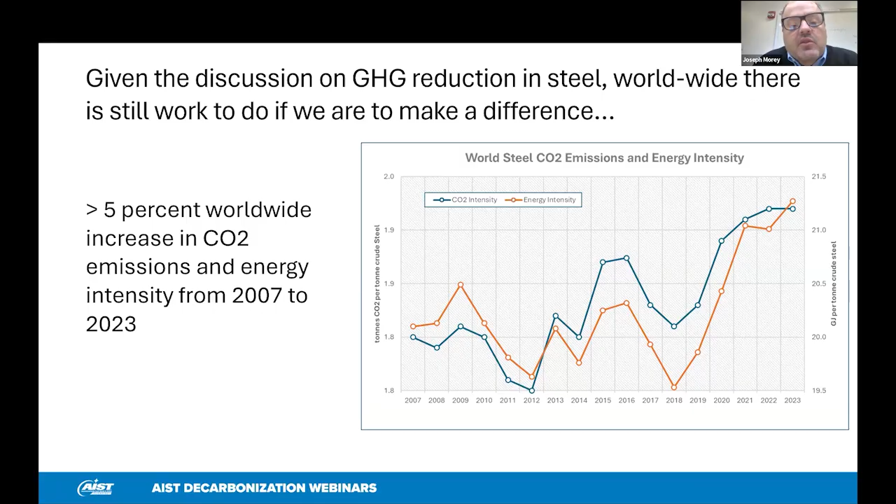The Paris Climate Accord came to pass, and there's a lot of signatories on this accord, and we all promised that we're going to reduce our carbon footprint as a whole world, and steelmaking is no small part of that. As you can see here, since the signing of the Paris Climate Accord, we've actually increased our carbon footprint as far as steel goes by 5%, from 2007 to 2023, and there's no sign that it's slowing down either.

So it seems that there's a strong iron, a blast furnace footprint for iron making. Over 70% of the world's steel comes from traditional blast furnace routes and blast furnace capacities that continue to come online.

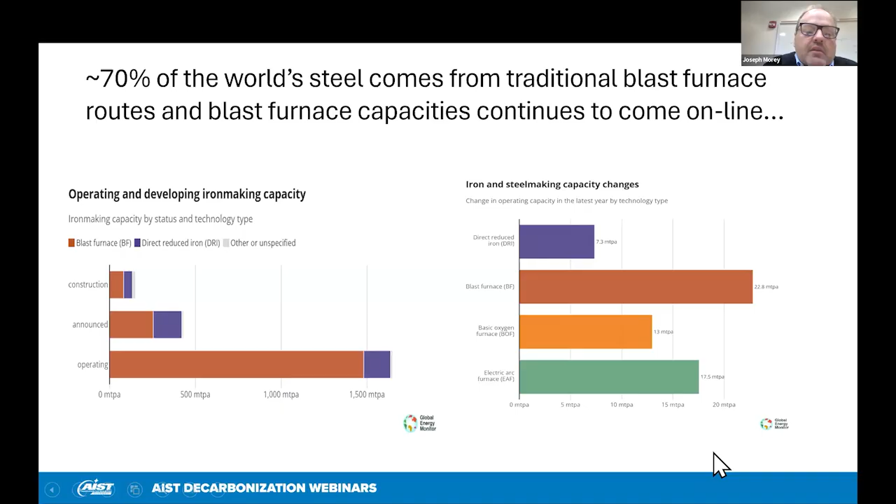Can you go to the next slide, please? As you can see here, in North America and Europe, there's blast furnaces that are shutting down, and in parts of Asia, blast furnaces continue to come online, and it just continues to balance out at around 70%. That figure has been stable for the past 10 to 15 years.

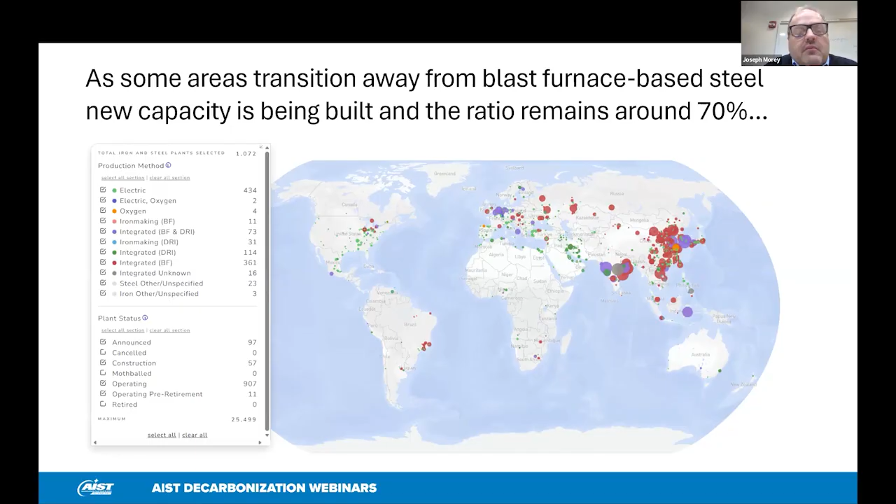Go to our next slide. So today, we're going to talk about the second part of our series where we talked about this pathway before. Now we're going to be focused on the boiler house, blast furnace, and steel making area on what exactly we can do to reduce our carbon footprint, which is the biggest lion's share of the carbon emissions.

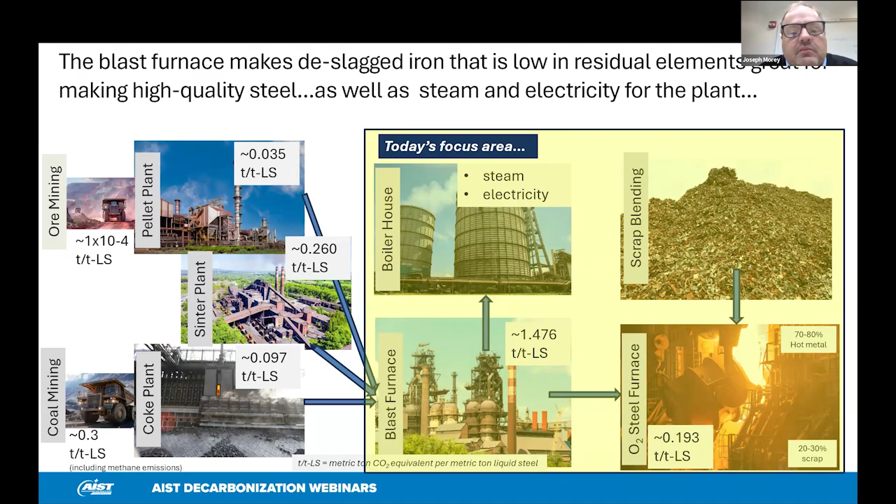Thank you, Joe. You summarized very succinctly the current dilemma that although we are looking at new processes that are going to be zero net carbon, the blast furnace process continues to predominate, and we need to do something about it right now rather than waiting for another 20, 30 years.

So the goal of our webinar today is to learn about what are the currently available practical and pragmatic technologies that can achieve significant reductions in carbon emissions right now from existing blast furnaces and existing BOF facilities, well before the cutting edge technologies that are on the drawing board can be commercialized.

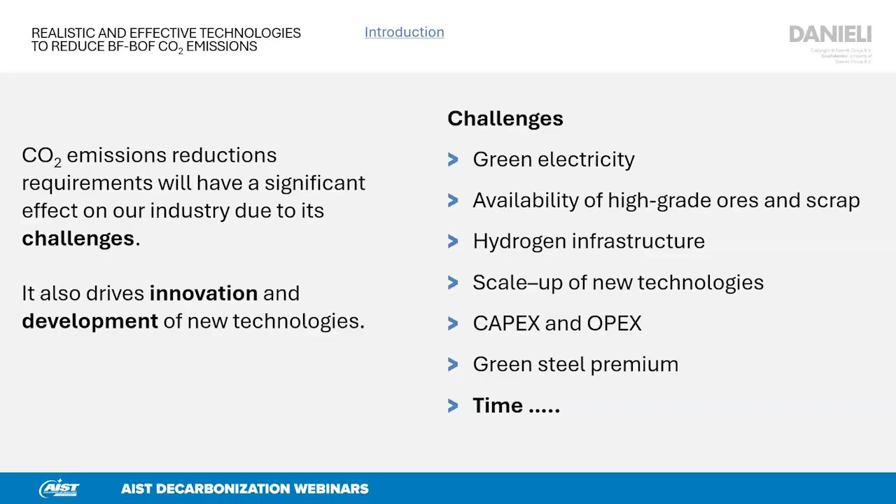We can wait for new emerging net zero technologies, but realistically, this will take another few years. Within our organization, we are convinced that a significant part of steel making for the coming decades will comprise basic oxygen furnaces and also blast furnaces, which is why we are determined to assist the industry in decarbonization of blast furnace and basic oxygen furnace.

For this reason, we started an internal assessment a little while ago to assess the impact and effect of different technologies that could be used for decarbonization of blast furnace ironmaking and basic oxygen furnace steelmaking. For this purpose, we set up a rather comprehensive spreadsheet model, which includes all of the main facilities of a typical integrated iron and steel making plant, such as sinter making, pellet making, coke making.

Also iron making, either by blast furnace, but also potential new direct reduction plants on site or remote. Steel making by means of basic oxygen furnaces, casting. And the spreadsheet model also includes oxygen and steam, and last but not least, electricity and hydrogen.

Any usage of hydrogen does matter because we have been assuming that any hydrogen would realistically be made by contemporary electrolyzers which are connected to the grid. The electricity grid carbon intensity these days is generally anywhere from 300, 400, 500, 600 grams of CO2 to produce 1 kilowatt hour. So we cannot ignore those emissions, as there's simply not enough green electricity as we speak to service the steelmaking industry. Maybe on the longer run using nuclear energy or other sustainable energies.

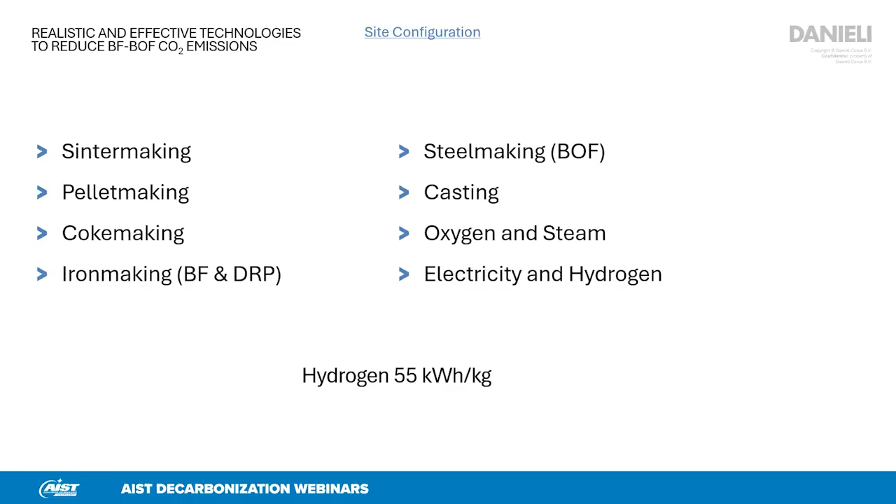And we have actually been looking into a typical large blast furnace with a coke rate of 340 - a little conservative number - and a coal injection rate of 180.

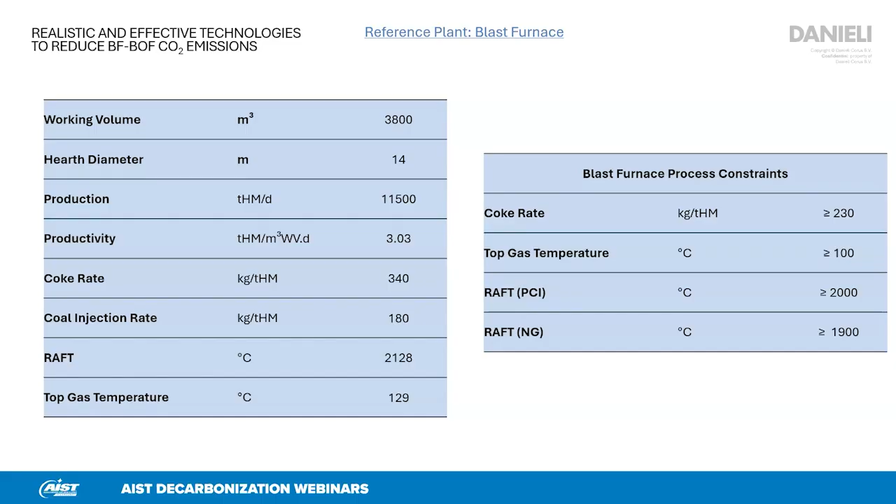The other key KPIs are reasonable. Within the spreadsheet model, we've been using detailed results of our thermodynamic blast furnace steady state heat and mass balance model, while assuming realistic constraints commonly accepted in our industry on minimum coke rate, minimum top gas temperature, and RAFT for using PCI or natural gas. Adding up all emissions of sinter making, pellet making, coke making, etc., the total emissions of this reference plant add up to around 2067 kilos of CO2.

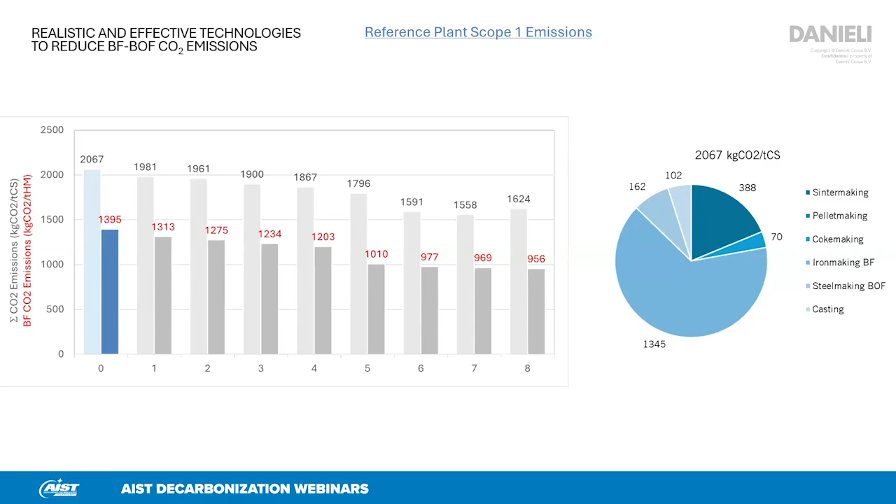We need to bring this number down. Within the remainder of the presentation, we will take you along on our journey, analyzing 3 different technologies to reduce crude steelmaking emissions to less than 1,600. By the end, I will also share a forecast, because that number could be even more reduced in another few years.

How could the number of 2,067 kilos of CO2 be reduced right away? There are 2 methods. The first is to implement best available technologies. Three such examples are summarized on this slide: a modern charging unit to reduce the coke rate through more optimum burden distribution and maximized gas utilization.

Second is to adopt modern hot blast stoves with a hot blast temperature of 1200 degrees centigrade instead of the more conservative 1100 degrees centigrade. Last but not least, implementing modern state-of-the-art automation level 2 systems, including, as an example, heat flux monitoring to reduce heat losses by gas flow along the reactor.

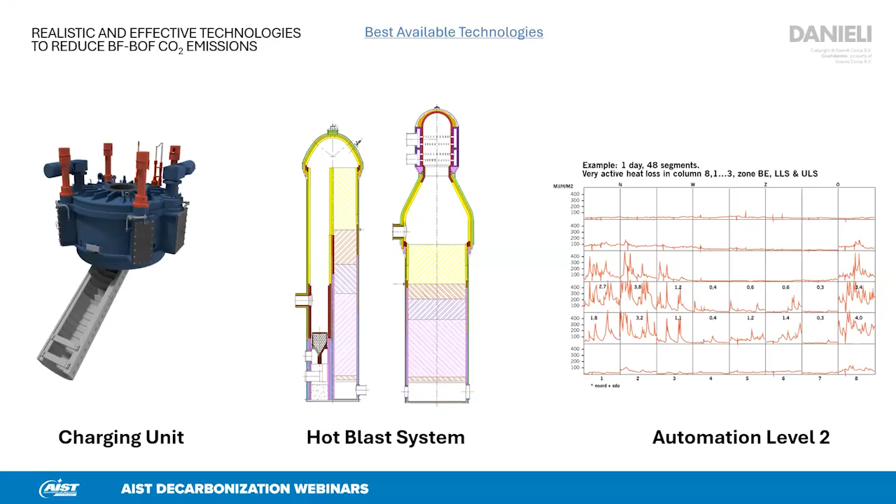Second, right away, the industry can further optimize efficiency and yield of blast furnace iron making and basic oxygen furnace steelmaking. Five examples we came across at some steelmaking companies are summarized on this slide: minimizing burden moisture and raw fluxes, maximizing yield and recycling of fines and reverts, and maximizing hot blast temperature, also by using energy-saving tuyere stocks and tuyeres.

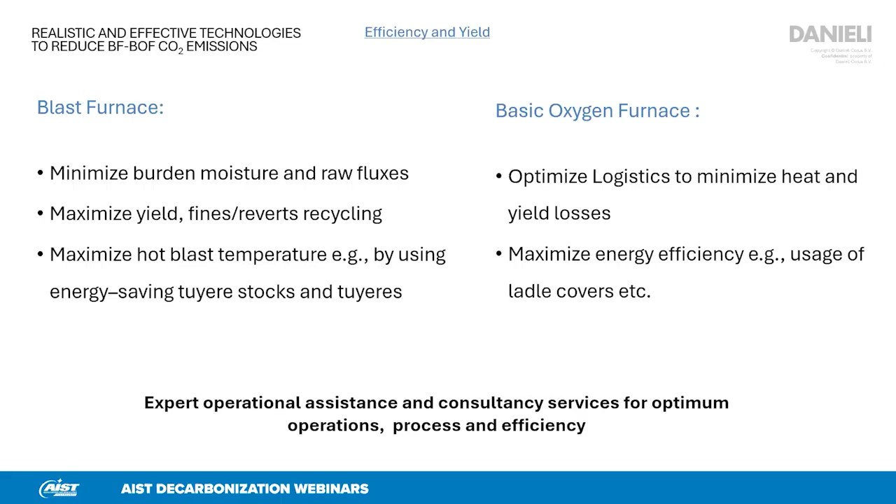When we look into basic oxygen furnace, we've come to realize many steelmaking companies could optimize their logistics to minimize heat and yield losses, and also maximize energy efficiency, for example, by usage of ladle covers.

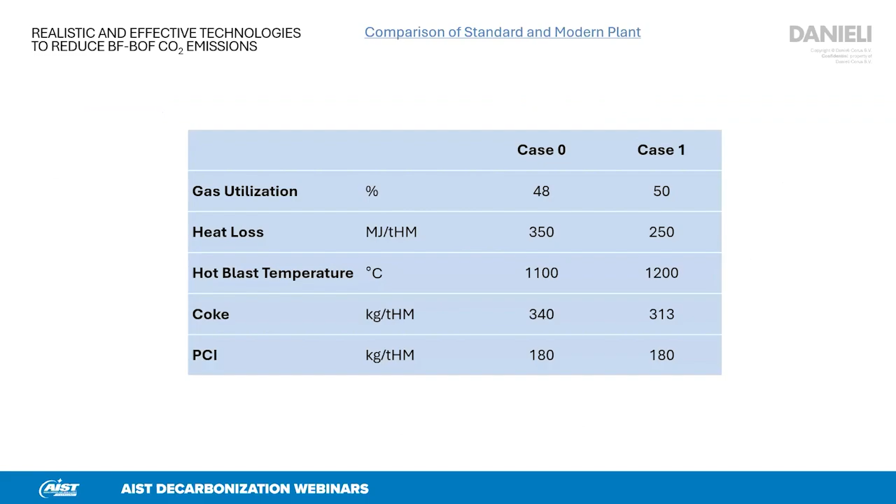If the best available technologies and some efficiency and yield improvements are factored in, emissions will already be reduced by some 5%, as a result of improving gas utilization, reducing heat loss in the blast furnace, and increasing the hot blast temperature. This will reduce the coke rate whilst retaining the PCI rate, and by reducing the coke rate, overall carbon emissions will be reduced to approximately 1,981 kilos of CO2 for 1 ton of crude steel.

This modern reference steelmaking plant is actually a net exporter of electricity, around 134 kilowatt hours for each ton of crude steel, by nature of combustion of any excess blast furnace gas and coke oven gas, using that heat to generate export electricity.

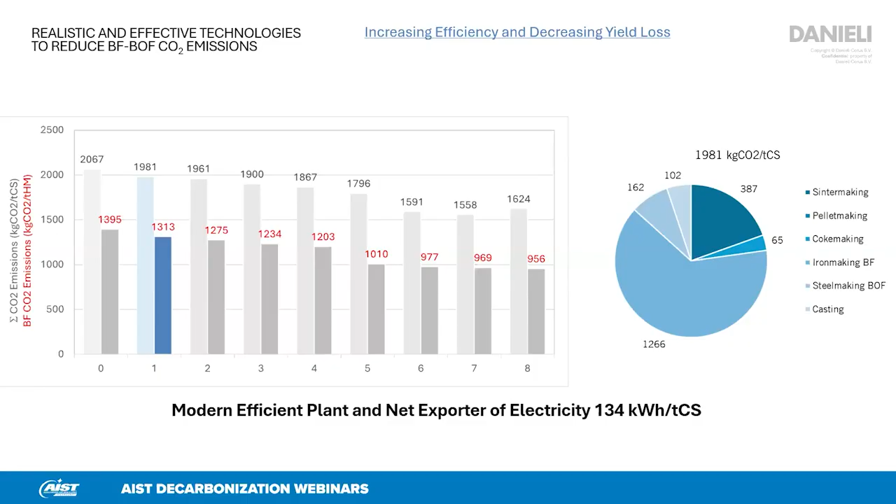Now let us look into one potential technology to reduce CO2 emissions, which is usage of gas injection. We've been analyzing 3 different types of gas injection. The first, already practiced in the United States and also in Russia and 1 or 2 other countries, is usage of natural gas. We've assumed this is constrained by a maximum amount of approximately 100 kilos per ton of hot metal, and it would rule out usage of PCI.

Second, we've been assessing the impact of using coke oven gas instead, at a moderate rate of 40 kilos for 1 ton of hot metal, plus another 180 kilos of PCI. You may wonder why 40 — we've realized the availability of coke oven gas on its own is limited by the coke making plant. Some coke making plants may produce more coke oven gas, others less, but we believe a moderate average number for our industry would allow usage of approximately 40 kilos of coke oven gas for each ton of hot metal, as we also need minor amounts of coke oven gas for enrichment in hot blast stoves, but also for heating in the reheat furnaces.

Third, we've been looking into usage of hydrogen, and we've assumed a moderate, reasonable rate of some 20 kilos of hydrogen for 1 ton of hot metal. Two industrial plants in our industry have already demonstrated usage of hydrogen in excess of 10 kilos on industrial facilities.

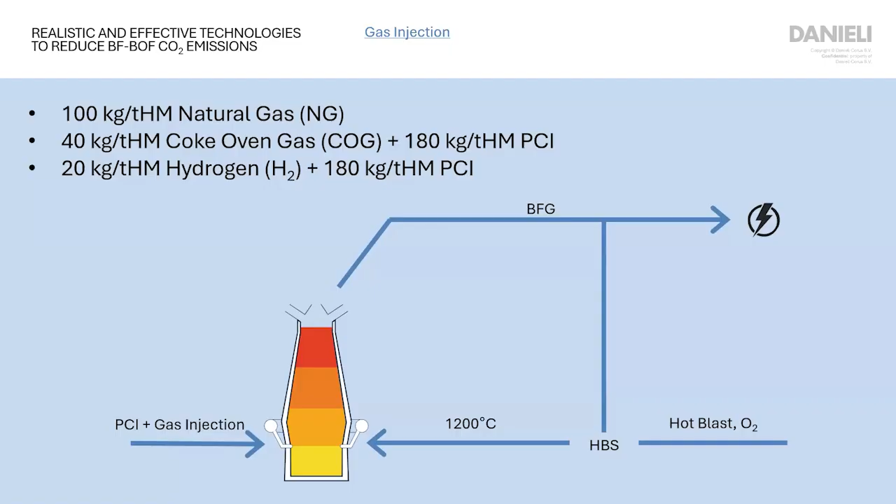Experimental blast furnaces have already demonstrated capability to inject much higher levels, even beyond 40 kilos. But there are some setbacks to doing this on the heat balance. So we've been assuming a moderate amount of 20 kilos.

Let us first look into the KPIs of the blast furnace when comparing natural gas, coke oven gas, and hydrogen. The coke rate for injection of natural gas is relatively high because we have nullified coal injection rate in order to allow maximum usage of gas. The coke oven gas coke rate and hydrogen coke rate are less than our reference blast furnace, which means CO2 emission reductions will be accomplished. For your information, the reference blast furnace plant had a coke rate of 313 kilos.

More interestingly, let's look into the impact on the electricity balance. The potential export of electricity will double when injecting natural gas because more blast furnace gas at a higher calorific value will be produced. The export of electricity will be reduced to only 32 kilowatts when injecting coke oven gas, because there would be no more coke oven gas for combustion in the power plant to produce electricity.

And far worse is actually the electricity balance when injecting hydrogen. Then we would need to factor in the usage of more than 800 kilowatt hours to produce 1 ton of crude steel by means of injecting 20 kilos of hydrogen.

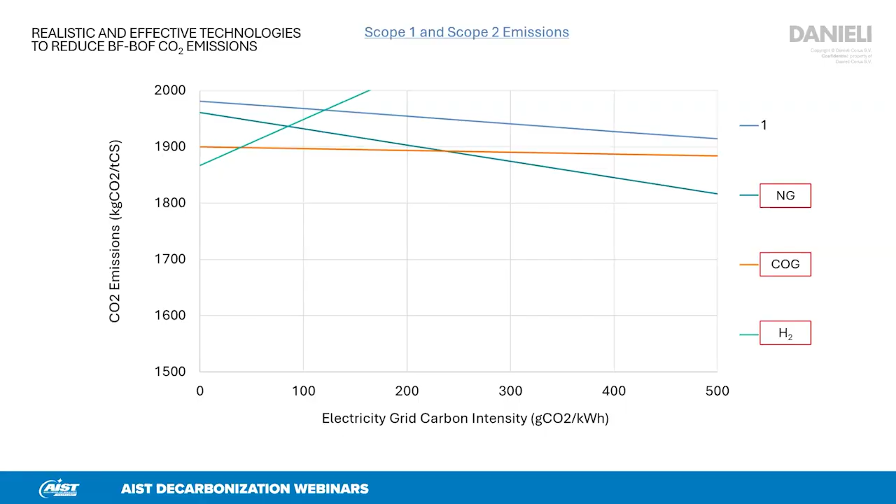Let's look into another group of technologies which includes charging of metallics in the blast furnace. And I deliberately refer to metallics. What are metallics? Metallics could be DRI, HBI, even scrap. Metallics could also include briquettes if they are mainly made up of iron reverts.

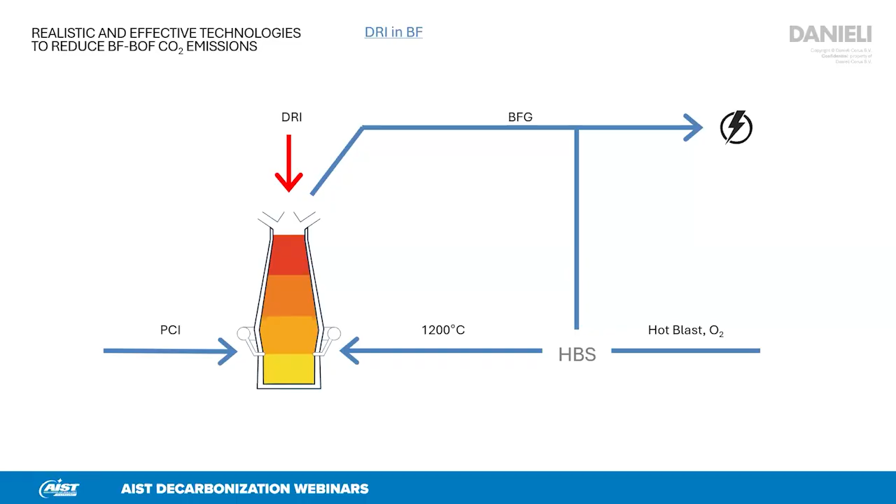We've been looking into different scenarios of charging metallics in the blast furnace, and within this presentation we will focus particularly on charging DRI. The examples I will share in the next few slides assume 30% of the burden comprises DRI. There's a good reason to limit this number to 30%. We've also made calculations for 40% and beyond, but I will explain later why we have looked into the 30% scenario, as we believe this is the most realistic these days.

DRI is made in a direct reduction plant, as we're all aware, and most DRI these days is actually made in shaft furnaces, which could include, for example, Midrex. This technology could use either natural gas, coke oven gas, hydrogen, even syngas, and I would say any blend of those gases. For simplicity, we are ignoring the usage of syngas, so within the next few slides we will only look into using either 100% natural gas, 100% coke oven gas, or 100% hydrogen for simplicity.

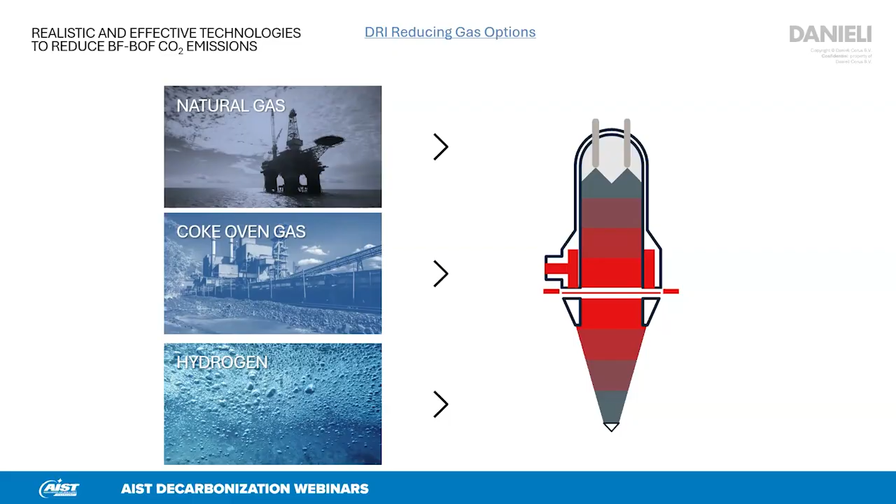Usage of coke oven gas for the production of DRI is actually not new, and I would like to put two examples to your attention. Those are two of the most recent industrial demonstration plants, which were commissioned and are currently operating in China, to produce 0.5 million tons of DRI per year and 1 million tons of DRI per year using coke oven gas. So the usage of coke oven gas to produce DRI on its own is not new, but the industrial scale is emerging fast in China as we speak.

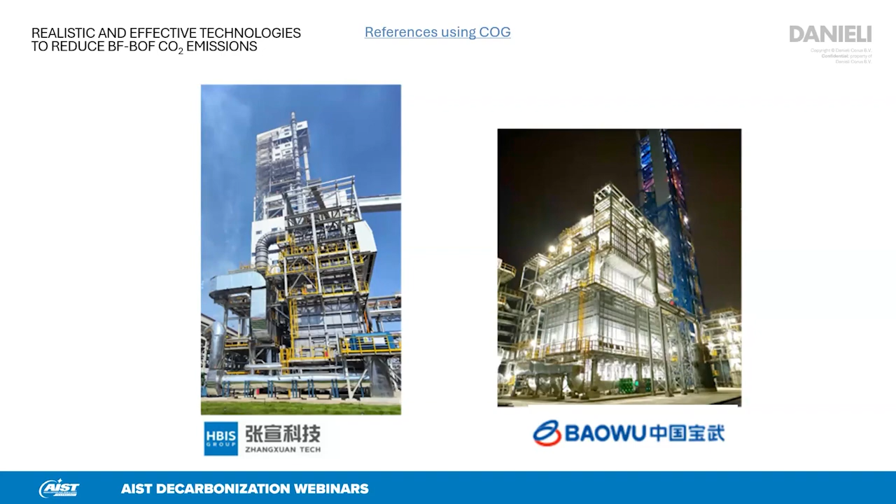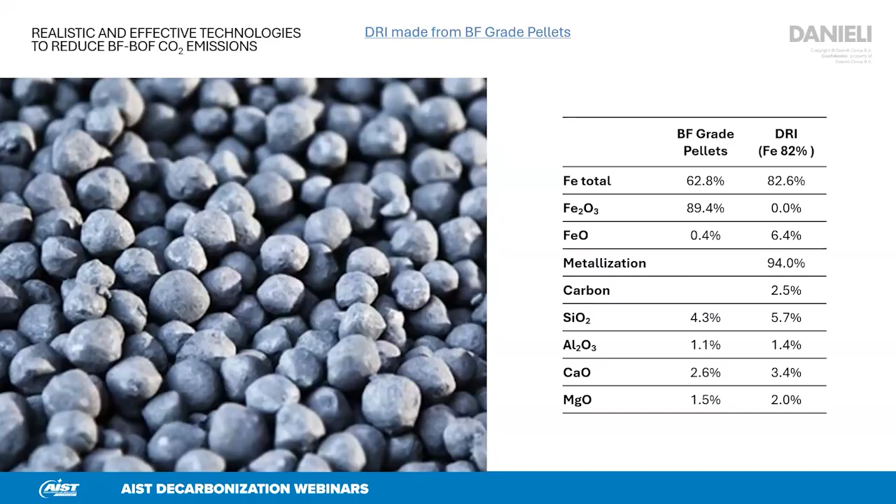Second to that, we know that high-grade ores are limited in availability, so ideally our industry would be using lower-grade ores. This is actually very attractive when charging this DRI in the blast furnace. We have been looking into the usage of BF-grade pellets to produce a DRI with a lower iron content, compared to an alternative scenario using DR-grade pellets, which would produce DRI with an iron content more than 90%. So this DRI is sort of low-grade DRI, it has a moderate metallization but a relatively high amount of gangue components. We can charge this in the blast furnace because the blast furnace is the ideal smelter.

Let us again look into the KPIs of the blast furnace when charging either DRI made by natural gas, DRI made by coke oven gas, or DRI made by hydrogen. You can see a coke rate reduction which is similar for all three scenarios. We have reduced the coal injection rate somewhat, mainly because we would then produce a little bit more coke. We also didn't want to violate the lower limit to the coke rate, which I already shared before. The more coke we would charge, the more coke oven gas we could produce, and this balances out to the 30% I've already mentioned. So if more coke oven gas would be available to the industry, then the 30% we have been assuming could be raised to 35, 40%, even beyond. But in reality, there are limits to the availability of coke oven gas.

Again, if we look into the electricity balance, it's still a minor export when DRI is being charged made by using natural gas. We need to import electricity when the DRI is made by coke oven gas, because all of the excess blast furnace gas would actually be used for the direct reduction plant process gas heater. But the amount of electricity that we would need when using hydrogen is really very, very significant.

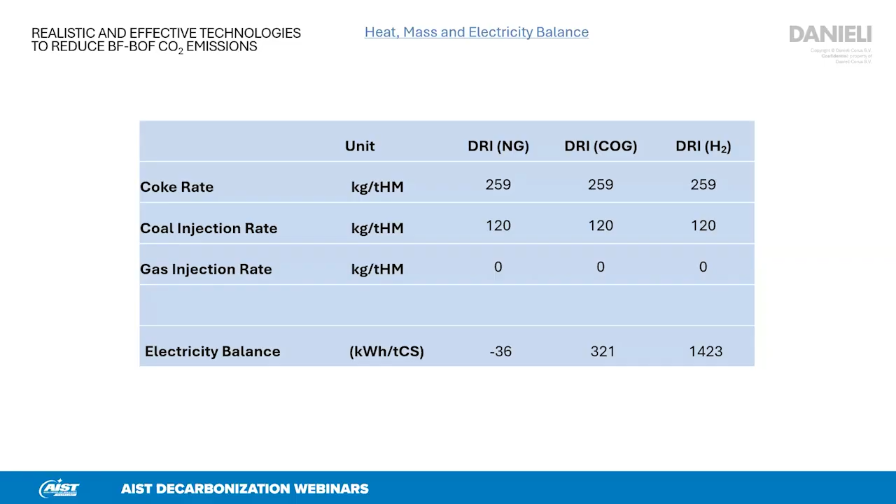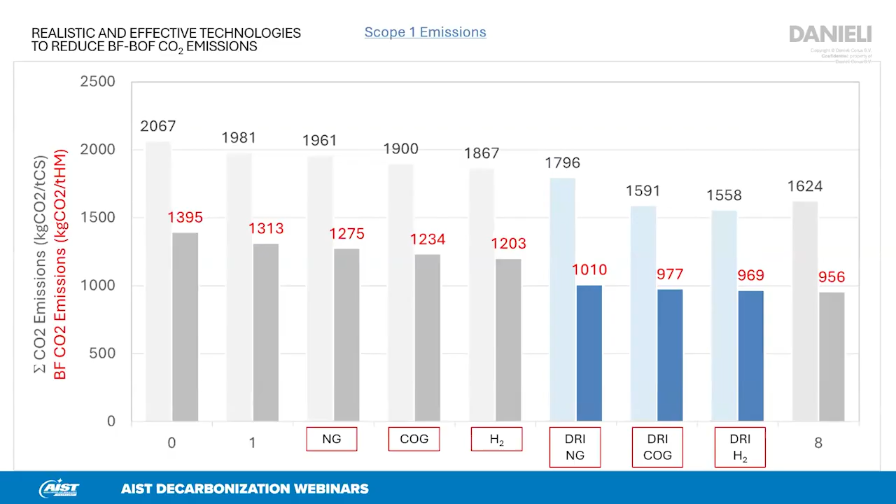If we look into the scope 1 emissions, using natural gas has a benefit, but it is limited because of the CO2 emissions generated in the direct reduction plant when using natural gas, also when using natural gas for the process gas heater. A rather significant reduction could be accomplished when the DRI is made by coke oven gas, and the same is true when DRI is made using hydrogen. But if we factor in the scope 2 emissions, then those would be quickly worse when DRI is made using hydrogen, and this DRI will then be charged into the blast furnace. So this graph suggests that the usage of DRI is beneficial, particularly when coke oven gas is being used to produce that DRI.

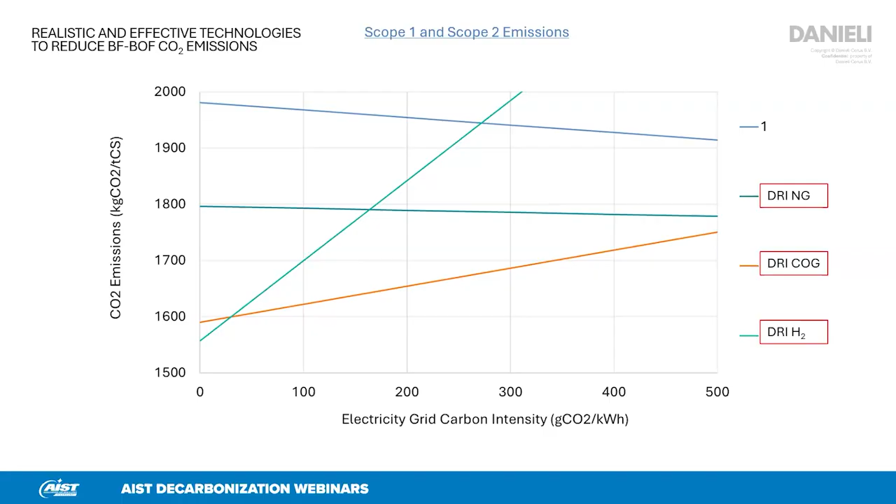Last but not least, we have a few minutes left. I would like to make a simple comparison to alternative top gas recycling technologies.

One of the main challenges in this industry is the scale up, because the scale up could have a dramatic impact on the efficiency of the top gas recycling scenarios. Until top gas recycling is demonstrated on an industrial scale, we simply cannot reliably predict the efficiency of this technology. So we've been assuming a moderate efficiency of top gas recycling, as reported in the industry.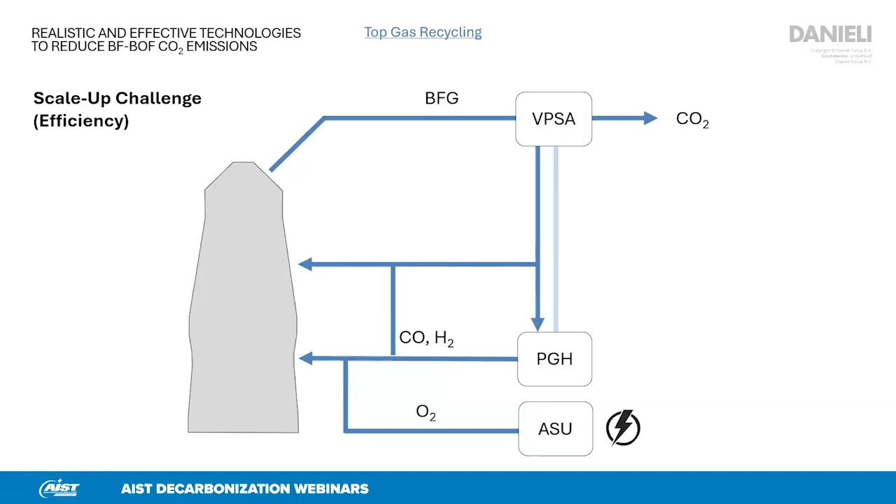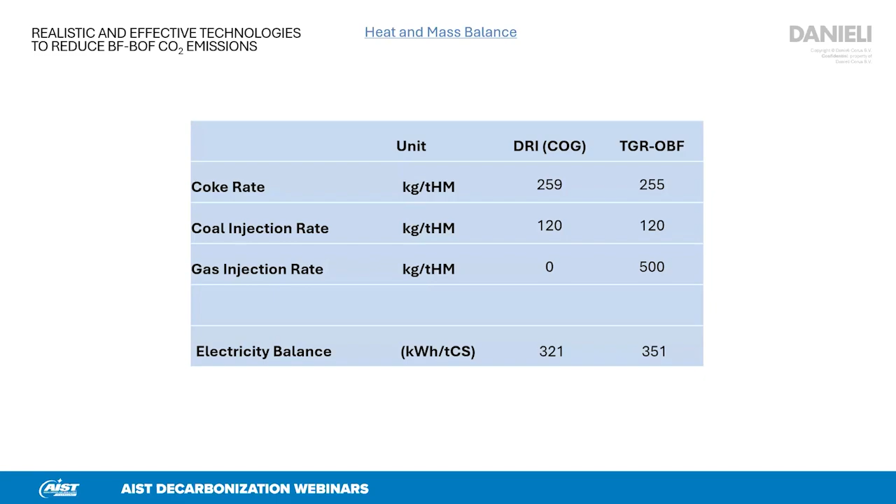Let's compare again the KPIs of the blast furnace and the electricity balance. What happens here is actually interesting: you can see right away that the coke rate of the option using 30% DRI made by coke oven gas and the coke rate of the top gas recycling option were comparable, I would say. In the electricity balance, it's also somewhat comparable. Let's make the chart.

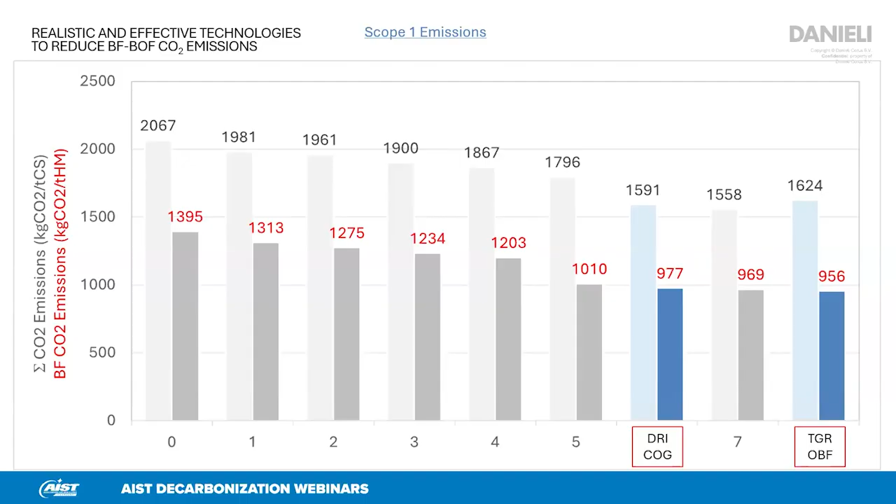As you can see, the CO2 emissions for scope 1 and scope 2 are also comparable. So we believe that charging the DRI using coke oven gas or top gas recycling oxygen blast furnace have similar impact on reducing CO2 emissions. But charging the DRI is already demonstrated on industrial scale. There's no new technologies, no scale-up risk, whilst those do exist for top gas recycling oxygen blast furnace. This is the main reason our current strategy focuses on charging the DRI, although we are not ignorant of the potential of top gas recycling oxygen blast furnace.

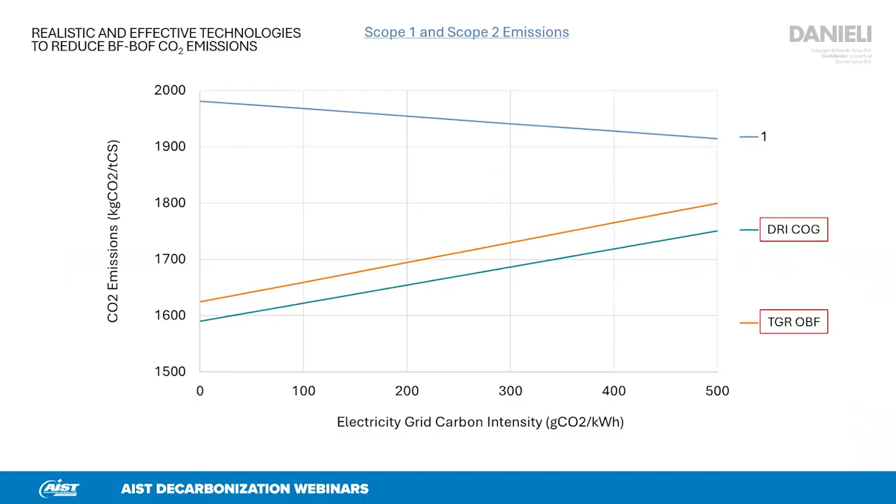Again, we can compare the scope 1 and scope 2 emissions, and I would say the two lines are somewhat comparable. I'd like to end this presentation with some conclusions.

We believe that realistic and effective technologies must be deployed right away, if not in the next 3, 4, 5 years. Those could and should include application of best available technologies, maximizing efficiency and maximizing yield.

Second, if gases would be injected into the blast furnace, ideally coke oven gas would be injected to reduce CO2 emissions. Third, more significant emission reductions could be achieved by charging DRI made using coke oven gas and also using low-grade iron ores.

This altogether would actually rule out the need for hydrogen. There's no risk in scale-up. We can use low-grade iron ores and continue to produce high-grade steel in the basic oxygen furnaces. This is why I believe these are realistic solutions to reduce emissions.

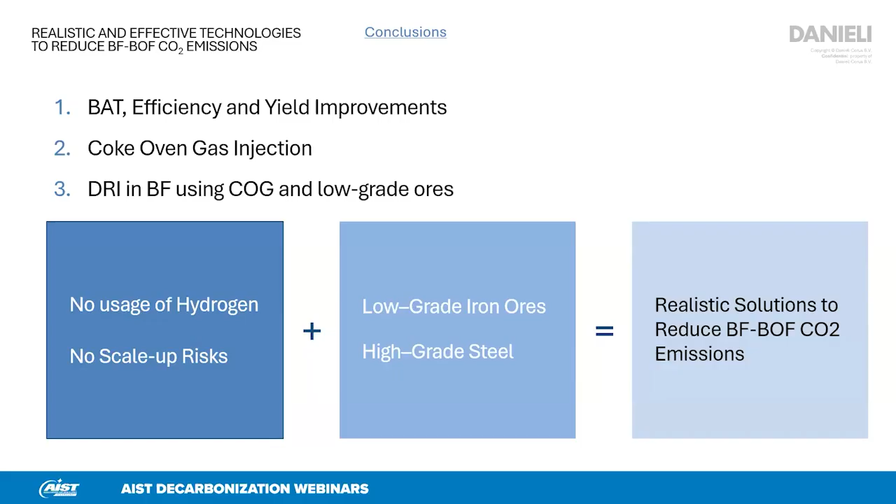Last but not least, I've just shared a few examples. In reality, we are already aware of the potential of raising metallics in the blast furnace to 40%, as demonstrated in Japan as we speak. We're also looking into maximizing metallics in converter steelmaking to 40%.

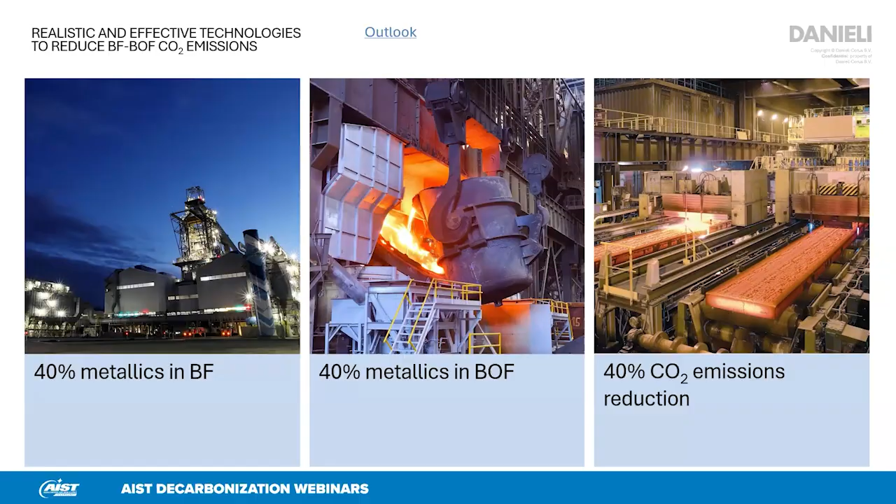If we add the one to the other, an overall CO2 emissions reduction of 40% could be accomplished. And there are some other trick cards we could add to actually reduce those emissions to less than 1,000. Thank you very much for your attention.

If there would be any questions, I'm happy to answer.

This is a very good question. I can only give a very generic response. Any technology we've come to realize will raise the cost of crude steel. That is only feasible if either CO2 emissions would be penalized, or if CO2 emissions reductions would be awarded by a green steel premium. It is not yet entirely clear to us which of those technologies would be most economic. For sure, the investment into top gas recycling oxygen blast furnace and all of the auxiliary plants is somewhat comparable to investment into a new direct reduction plant, which is a mega number. Capital investment into any gas injection technologies is, I would say, rather moderate. I hope that answers the question for the moment.

There's another question from Scott Norris: what is your opinion on the possibility of using biocarbon in the sintering and coke making steps to reduce the amount of coal utilized? These smaller quantity applications seem possible.

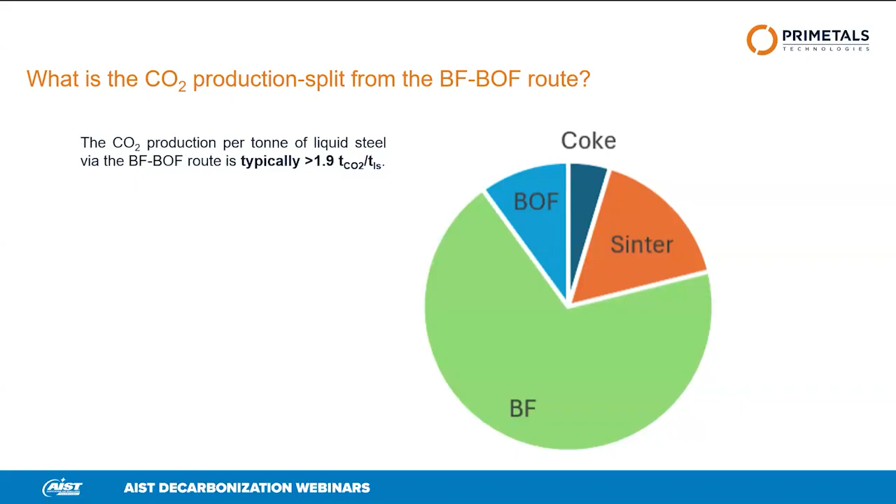But in preparing for this webinar, one of the questions Joe Morey asked us was, what is a good blast furnace? And I had to think about that question and how to answer it. Some operators listening will be lucky enough to have very modern furnaces with the latest facilities and benefits I'm going to talk about. But most people listening will probably have older existing assets and might be asking, what can I do? So what I want to do is talk not about the best technologically available blast furnace, but what helps with OPEX and what helps with CO2.

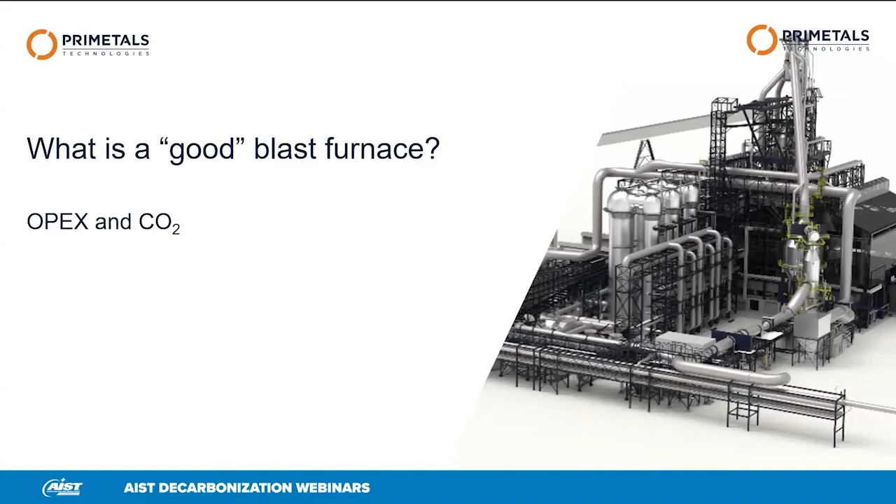So what is a good blast furnace? I just made a list of some of these items. But first, what does a blast furnace do?

We have to be honest, the value add in the blast furnace is nothing like the downstream technologies. So what we're normally trying to do is produce the lowest cost hot metal for use downstream. And what lowers hot metal cost? Well, best raw materials, clearly.

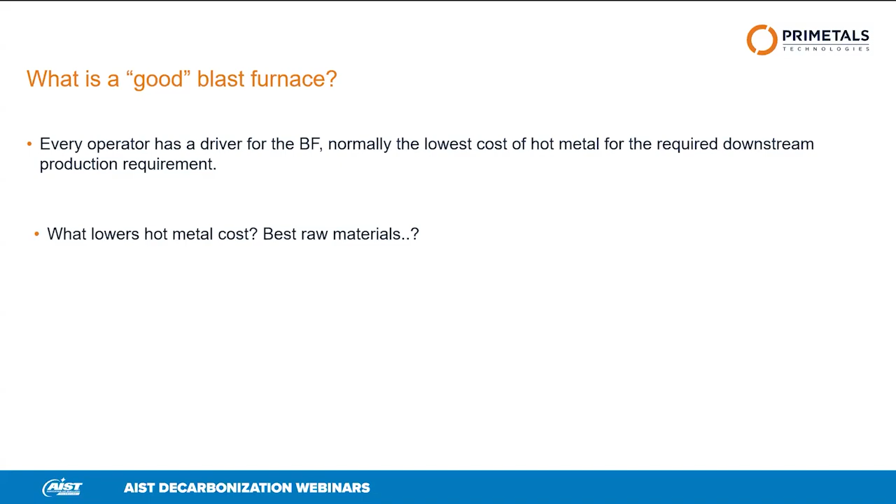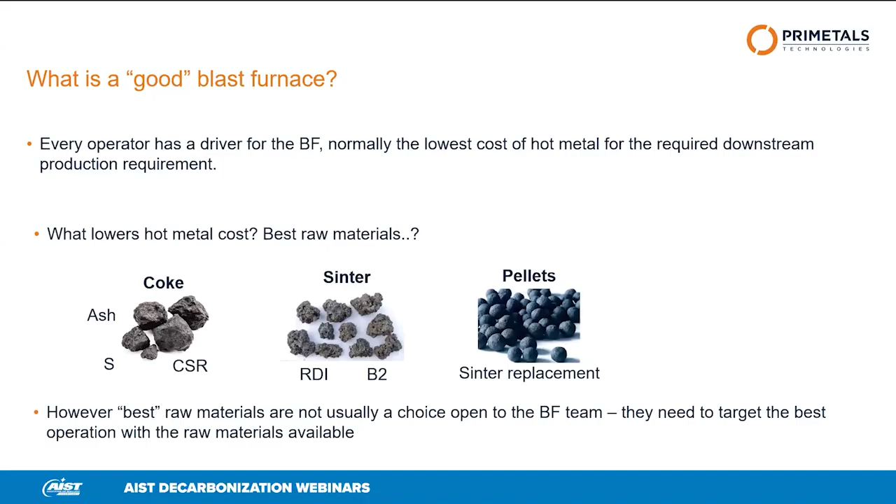Can I have the finest coke? Can I have the world's best sinter? Can I have the best pellets, etc.? But frequently, the best raw materials are either not a choice open to the blast furnace team, you're at the vagaries of the procurement team, or as we know, available quantities are coming down. So what we need to do is target the best operation with the raw materials available.

So the next slide just talks about some of the technological activities which can be used to both reduce hot metal cost and CO2. I won't go deeply on this slide. I've got another slide where I'll talk them through a little bit more, but it's not an exhaustive list, I'm absolutely sure.

But these items, if utilized correctly, are all going to help reduce your OPEX. And I guess because such a large percentage of the cost of running a blast furnace is the fuel and the carbonaceous fuel, most of these activities, in fact all of these activities, are going to bring the CO2 level down as well.

So maintenance to maximize your availability and to minimize the time when the furnace isn't running efficiently. Bell-less top for burden distribution. Level 2 optimization system, blast temperature, maximizing your blast pressure, or should I say your top pressure, within your available constraints. Top gas energy recovery turbine, the TRT, if you've got enough pressure. Avoiding gas flaring, and the SIP oxygen pulsing, which I will explain briefly later on, which is a relatively new technology.

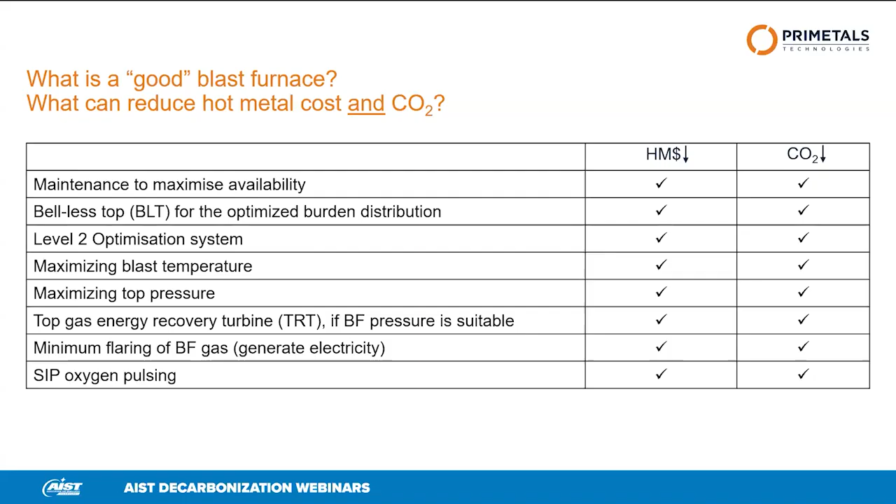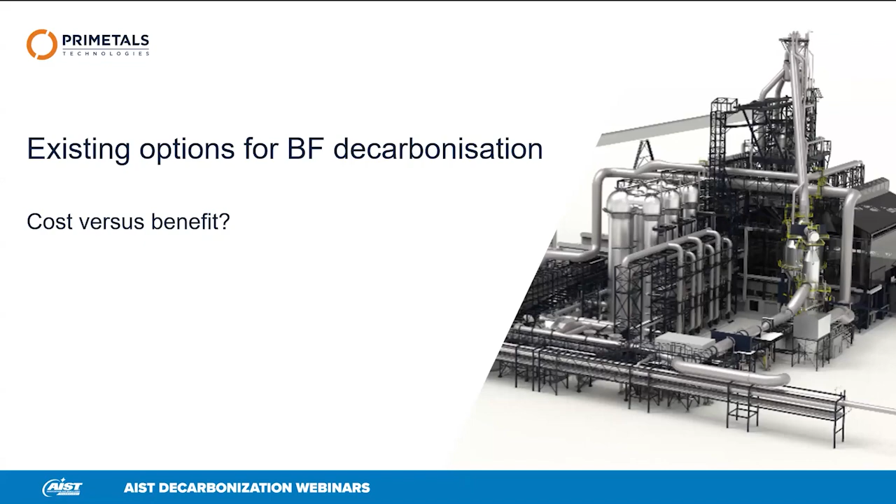There are a lot of other options out there for reducing CO2, but I wanted to try and discuss at a very high level, cost and benefit, because there are many options, more than I could fit onto one slide with photographs that you'd be able to read. So I've put a few just onto this slide.

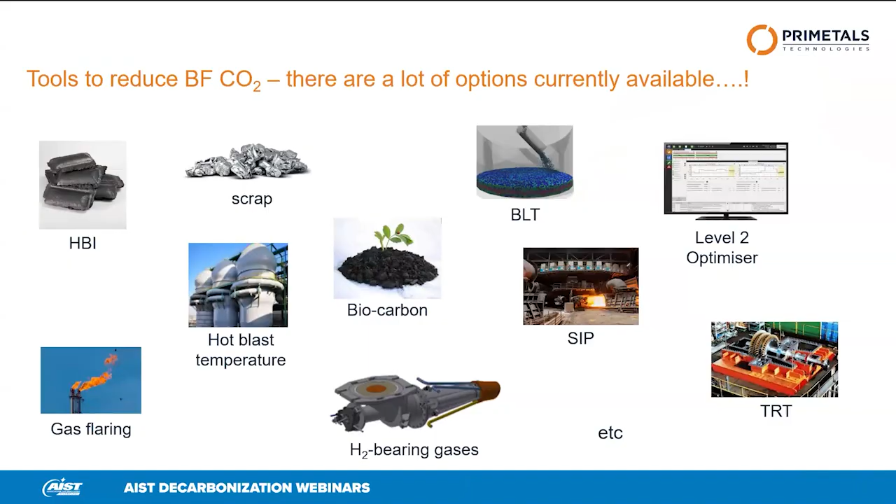But what's important, I think, is then to talk about them individually and maybe try and rank them. And in trying to rank them, how do you do that? So I've put a series of technologies on the left-hand side here, and I'm going to, again, at a high level, try and rank them on OPEX, operational cost, CAPEX, that's the capital expenditure, CO2 benefit, and then some comments on the side.

The one that seems to be most obvious from a cost benefit solution is the level 2 system, an optimizer for BF operations. OPEX, will it decrease OPEX? Of course it will, yes. What is the CAPEX for it? And you can see I've been very careful with how I've described CAPEX. I've called it very low. Everything else in my list is going to be either low or medium.

I guess when you are looking at a particular plant and the cost of the modification, and I'm thinking not the cost that the OEM is going to sell you a technology, it's the project cost for implementing the technology, so what the steelmaker pays. In my mind, low is in the region $1 to $10 million, and maybe medium is in the region $10 to $20 million. These are indicative. And level 2 is at the bottom end of low, so I'm going to call it very low. And depending on your starting point, of course, we see a CO2 benefit of something like 2.5%. So that seems to me absolutely the no-brainer.

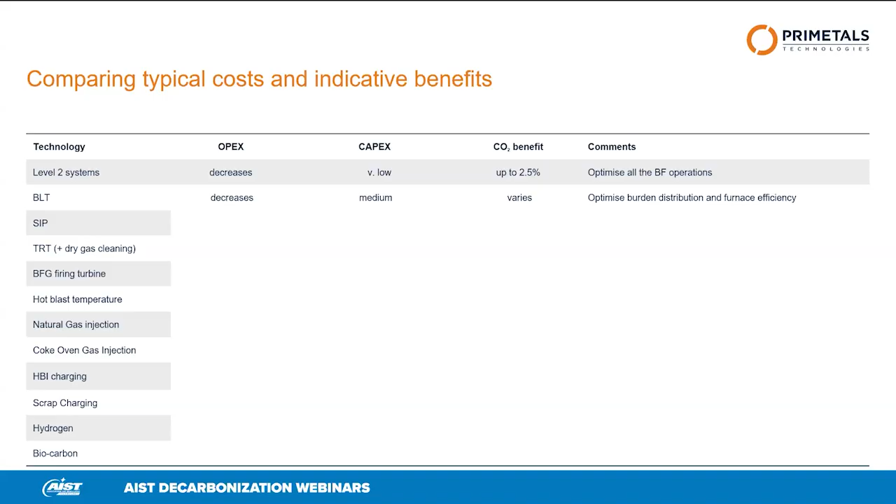So I have OPEX decreasing, CAPEX, as I say, to actually implement the BLT is probably low end of medium. And the CO2 benefit will be there. I would expect it to be there, but again, it will depend on the starting point, how good your operation is already.

I'm continuing in the way I'm ordering these, starting with the OPEX, in order to reduce hot metal cost. So I've put SIP next.

This is the sequence impulse process, oxygen pulsing. It's a relatively new technology. I've got a couple of slides on that. I didn't want to make this much of a promotional presentation, but I'll explain it in case there are people out there who aren't aware of it. This has been proven to decrease OPEX.

The CAPEX sits again probably in the lower end of medium. The CO2 benefit is, all of these are incremental CO2 benefits, and some of them can be added together. But for this one, the payback can be very large, very fast on larger furnaces. So I'll talk about that later.

Top gas recovery turbine and maybe dry gas cleaning. A TRT if you haven't got one, and if you have the top pressure to make it economic to drive one, which are both the proper questions to ask. If a TRT can reduce the OPEX, it's probably going to be in the medium range of CAPEX, and again an incremental CO2 benefit.

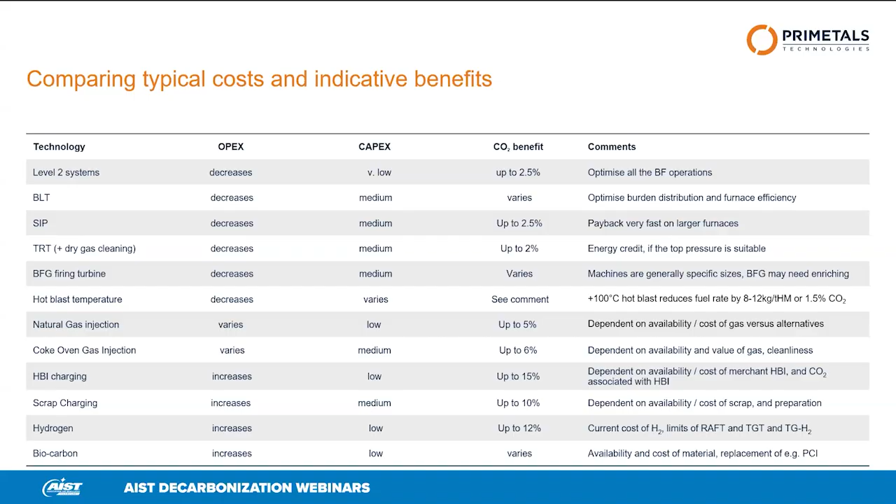A very quick introduction to SIP technology. This isn't meant to be a promotion, but just in case you weren't aware of it, it's on my list of opportunities. Sequence impulse technology is an oxygen pulsing technology developed by ThyssenKrupp in Germany on their blast furnace number 1 at Schwelgern, Duisburg. And the oxygen pulse is used to clean out the back of the raceway, the bird's nest.

Particularly, I guess, with PCI char, which is obviously a challenge for any furnace with PCI, but not a challenge for furnaces without PCI. But combusting, burning out the very small coke particles as well is what the technology can do. And by doing so, you're both extending the raceway and cleaning out the back of the raceway to allow gas further into the blast furnace.

And one of the benefits that leads to is an ability to reduce your coke chimney size. And by reducing your coke chimney size, that means that your CO utilization can be increased, maybe by order of magnitude 1.5%. And that means that the furnace runs more efficiently. But the technology has also been proven to allow you to inject more PCI than you had been injecting, and by definition to reduce your coke rate by similar amounts.

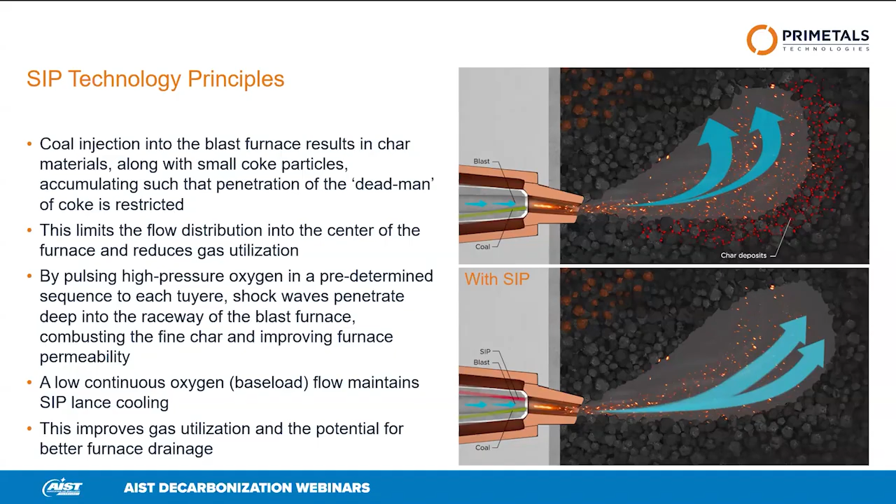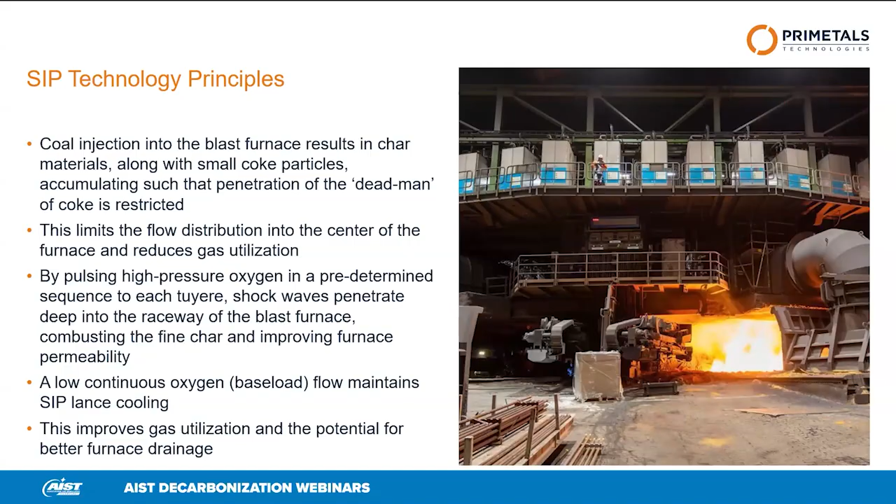Picture of the plant at Schwelgern, and as you can see, the top of the picture there is a pulsing box for each tuyere.

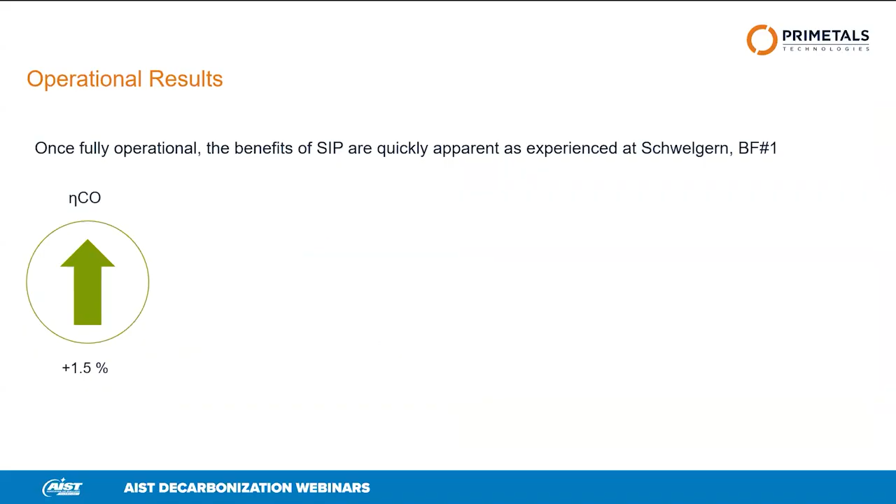What does it mean? This is what was seen at Schwelgern. As I said, ETA-CO, the efficiency of carbon utilization up, coke significantly down, coal up, fuel rate down, CO2 down. Again, an incremental CO2 reduction, but the coke saving, where coke is your most expensive fuel, can and does lead to return on investment of maybe 2 years for a project.

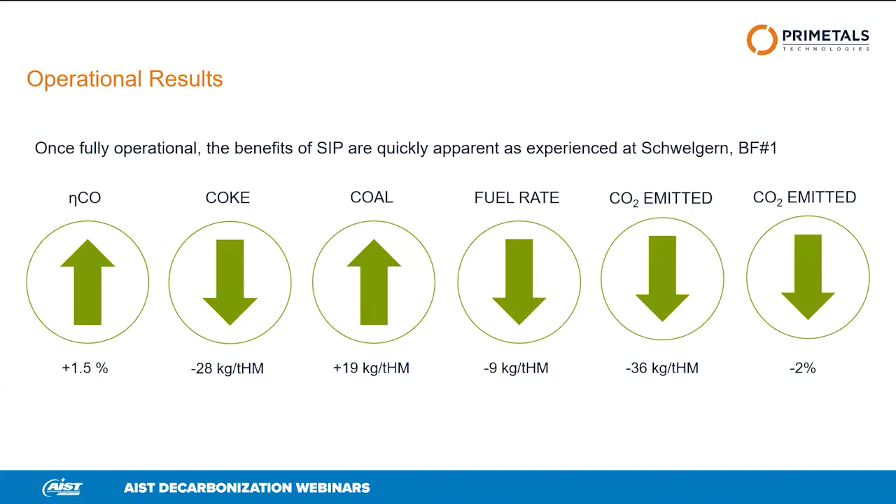And Primetals are currently building the first SIP plant outside of Germany in India on a 5,000 cubic meter blast furnace.

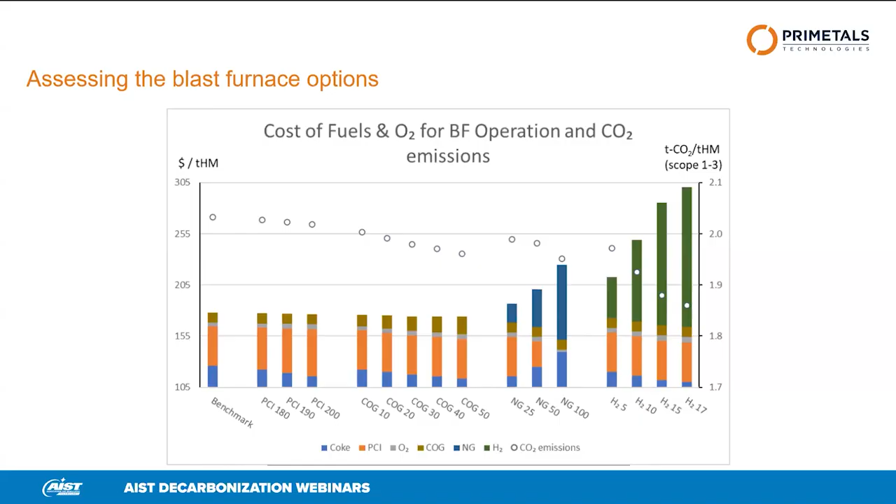I'm now hopefully going to hand over to Gerald. Yes, you can, Dave. Tell me when to change the slides.

So we discussed about the BF-BOF route. We thought it's worth spending also some time on the BOF route, the second step of this process. We have discussed a bit of metallics, how metallics input is changing the CO2 emission.

As we can see on the next slide, this is exactly the lever we have on the BOF converter. On the BOF converter itself, we cannot do that much to reduce the CO2 emission. We need some carbon in the BOF for heating, for metallurgical reasons, to remove the phosphorus, to purge out the nitrogen. But we have a lever by selecting the input material.

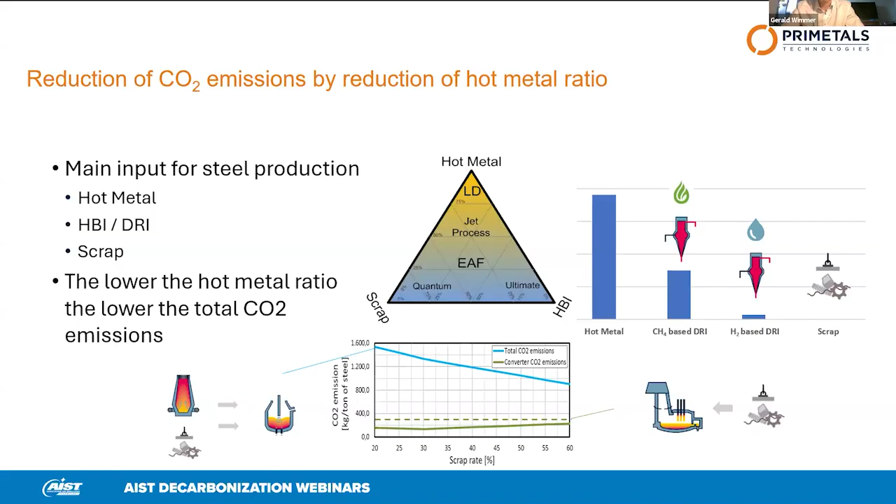As we can see on the next slide, what are the main challenges to increase the scrap rate in converter steelmaking, as we're discussing mainly about existing plants, is scrap logistics. So of course, we would like to do more scrap, which means we have to purchase more scrap, so we need inbound scrap logistics. We have the converter process where we have to ensure sufficient mixing and melting energy, and last but not least, scrap quality.

So there is, of course, a topic with trace elements in the scrap. If we do more on the converter, we have to be careful that we keep the limits, for example, for copper and tin in our final steel.

To melt more scrap, we need more energy, so we have to keep this energy balanced, what we take in and what we take out. We can work on this energy balance by bringing additional energy, for example by scrap preheating, by additional post-combustion, or simply by better process control to reduce energy losses, by better logistics, and by eliminating all the cooling agents that are still today used in converter steelmaking.

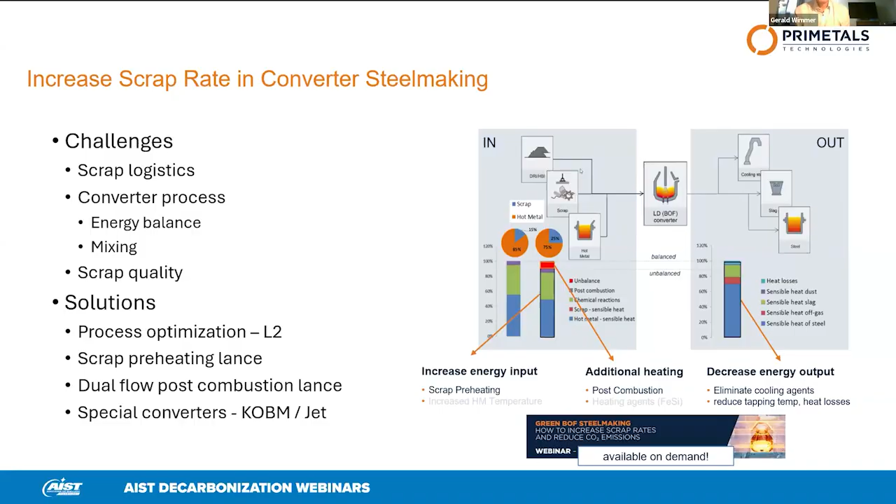Some examples of these tools to increase the energy supply and therefore the scrap rate we can see on the next slide. We can see some of these on the very right-hand side, the scrap preheating lance, where we can preheat the scrap before we charge the metal.

Such a system, for example, is used by voestalpine Donawitz. They have two small blast furnaces. When one of them is in relining or maintenance, they are short on hot metal and have excess time on their converters, so that's a good trick to use this time for scrap preheating.

If the scrap is hot, it takes less energy for melting later during the process. And as a consequence, you can melt more scrap with the energy available in the hot metal.

In the converter, we combust carbon, but not very efficiently. We just combust it to CO. That's why the converter off-gas has high calorific value and is collected and used in the gas holder.

Another way to use the calorific value of this gas is to do post-combustion to CO2, already partly in the converter. This is happening in our process standard-wise to 10%. If we increase the post-combustion ratio to 20 or 30%, we can increase the scrap rate again by some 5%.

Last but not least, we have to minimize the energy losses. This is best done by having accurate logistics and accurate process control, and for this, process models are very helpful. The process model allows upfront calculation of the heat with the accurate energy balance. Then we know precisely how much energy is available and how much scrap we can process with this energy. And then we can order the right amount of scrap and charge the maximum scrap amount possible. All in all, these tools allow a standard BOF converter to increase the scrap rates to some 25%.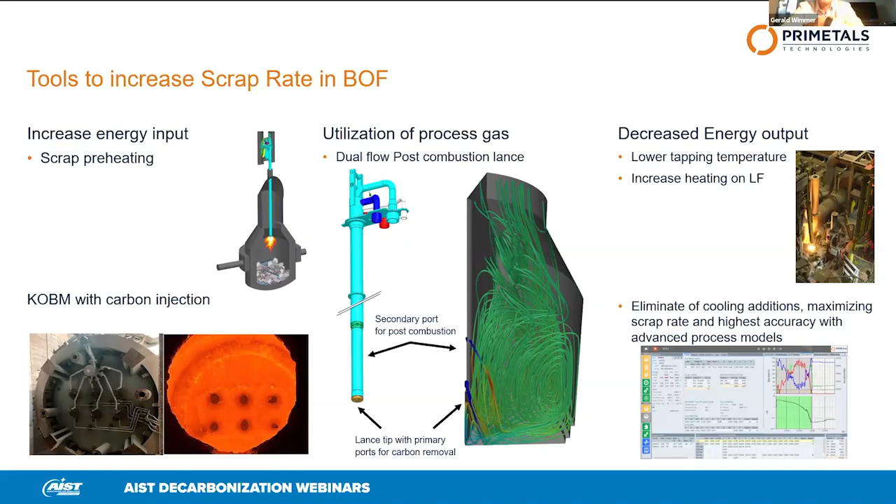And we see interest in this technology now for a green transition of the integrated route, for maximizing the scrap rate. And now, the combination of what we can achieve if we combine the reduced CO2 emissions per ton of metal and the higher scrap rate in the BOF converter, which Dave will show us on our last slide. Well, this is the penultimate slide.

Thanks, Gerald. So the final slide will demonstrate just in one picture what can be done today without excessive capex, without hopefully extending your OPEX, keeping you competitive. I've picked a blast furnace based on PCI. I've assumed that its current situation is 100% CO2 with a 10% scrap rate.

There are things you can do to get down to 90% CO2 or 80% CO2, whether it's a PCI-run furnace or a different fuel like natural gas. Other tricks are there to bring the CO2 down from the blast furnace. And as Gerald says, in order to reduce the overall CO2 per ton of liquid steel, increasing the scrap rate is part of the solution.

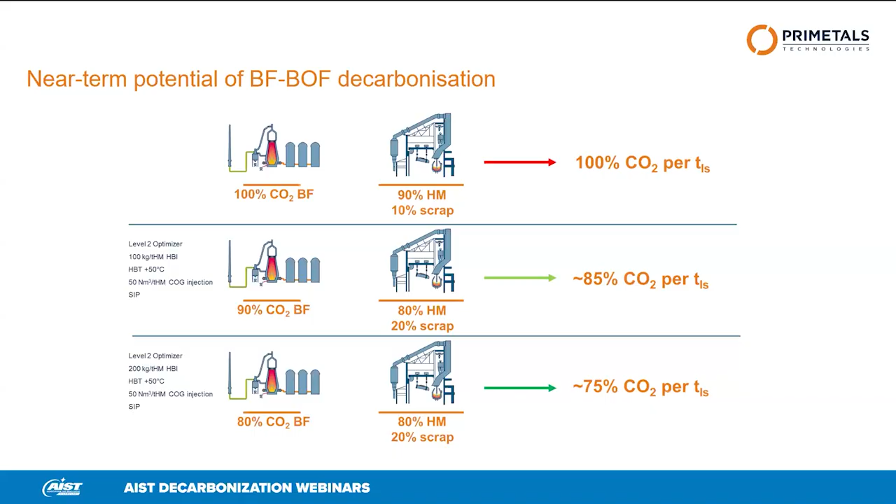So I haven't tried to demonstrate the best available figures here. I've tried to make it believable, and that means that if you could get to 25% scrap, for example, you'd be able to do better than the 75% or 25% reduction through the integrated route. And that's the final slide. So thank you very much for listening, and question time.

That was great, guys. Thanks for the presentations. Those are really a nice little menu of things that you can do to get things going today, which is helpful for everybody, I would think.

I have a question from Andre Oliveira. He says, excellent presentation. Has a SIP condition with multiple injections been simulated? For instance, PCI and natural gas, or PCI and biocarbon? Thanks for the question, Andre.

It's something we're working on at the moment. The benefits of PCI and gas injection, the benefits of SIP and gas injection, will probably be a little less than if you're injecting PCI, because you haven't got the char at the back of the bird's nest. But it is something that we need to model, and something we're actively trying to understand, not only for the US market potentially, but for other people who might have access to lower cost gases. We've got a customer in India who already has access to a synthetic gas which looks very much like coke oven gas in its chemistry.